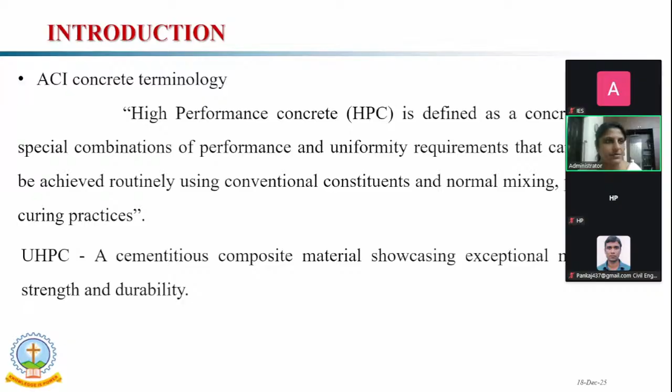All this performance can be achieved by incorporating high strength steel fibers. We are considering only the fine aggregate; we are neglecting the coarse aggregate, and using binders, chemical and mineral admixtures, and water.

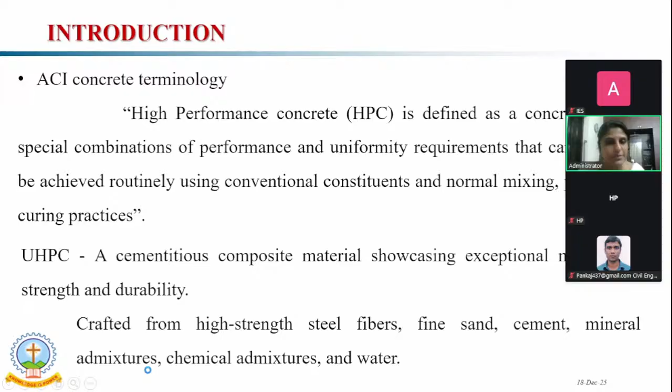UHPFRC means ultra high performance fiber reinforced concrete. It is a combination of three types of concrete: one is high performance concrete, one is self-compacted concrete, and the third one is fiber reinforced concrete. The mixture of these three is the ultra high performance fiber reinforced concrete.

The basic requirement of ultra high performance concrete is that, in order to get the high performance, we need high binder content. As you all know, because of the high binder content, that means high cement content, this will negatively impact the sustainable aspect.

So we have to reduce the cement content by considering some mineral admixtures or supplementary cementitious materials of high pozzolanic material content. The high performance of UHPC can be achieved by considering the low water to cement ratio. We have considered the water to binder ratio as 0.17, 0.18, and 0.19. But by considering the low water to binder ratio, we cannot achieve the required flowability.

The main criteria we consider for ultra high performance concrete are the compressive strength beyond 120 MPa and flowability of minimum 200 mm, since, as I said earlier, it's just like a self-compacting concrete. In order to get the flowability of 200 mm with the low water to binder ratio of 0.17 and 0.18, it is very difficult to achieve.

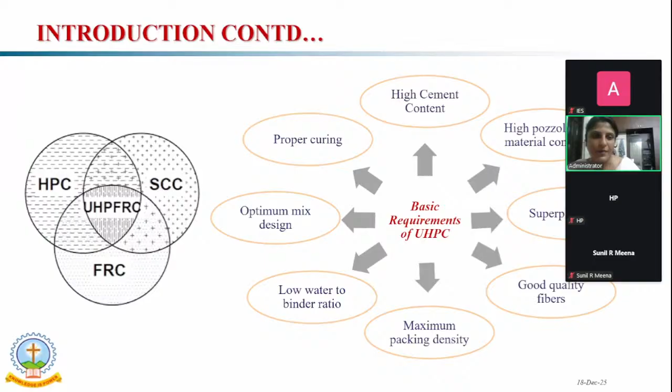If you compare the properties of normal concrete, high performance concrete, and UHPC: in the case of compressive strength, normal concrete, as you all know, is in between 20 to 50 MPa. For high performance concrete, it is in between 60 to 120 MPa, but in the case of UHPC, it is above 120 MPa.

Similarly, the flexural strength for normal concrete is 3 to 5 MPa, while for UHPC it is around 20 MPa. In the case of tensile strength, normal concrete is 2 to 5 MPa, but for UHPC it will be up to 15 MPa.

The modulus of elasticity is 25 to 34 GPa in the case of normal concrete, but in the case of UHPC, it will go up to 50 to 60 GPa.

If you consider the historical background of UHPC: as we are familiar with the development of Portland cement in 1824, from that 1824 to the development of HPC, that was in 1970, and UHPC was first introduced by de Larrard in 1994, until the UHPC of today.

To develop the UHPC, we have considered these 5 criteria: material characterization, optimum packing density, mixing technique, fresh UHPC state, and the curing methods.

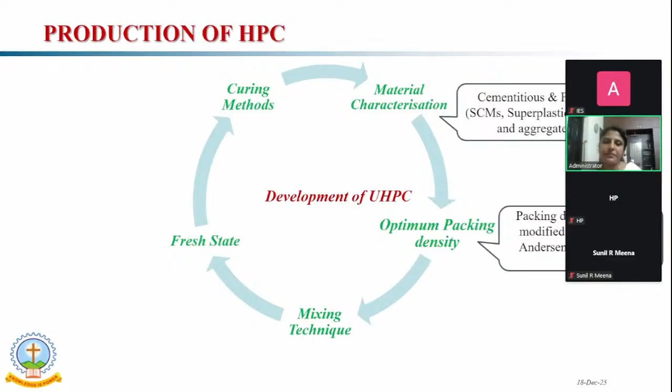To get the optimal particle packing density in the laboratory experiment, we have considered the Puntke test. And by using software, we have considered the EMMA software, which is based upon the modified Andreasen and Andersen model. The EMMA software is developed by Elkem. That will be discussed later.

The mixers we have in the laboratory: we have used the Hobart and planetary mixer, and we have done that experiment. Then we have developed UHPC with 150 MPa using the high shear mixer, that is an RMC.

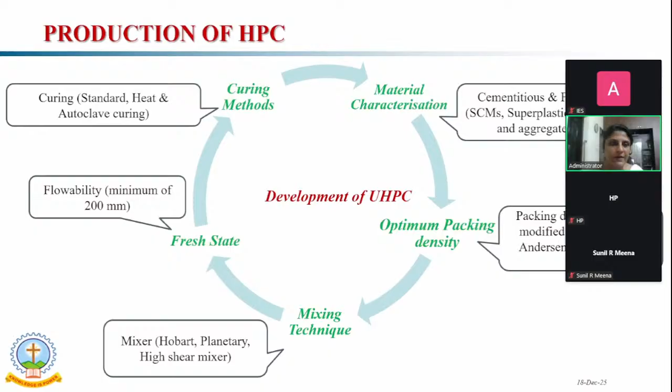Flowability we have considered, as I said earlier, minimum 200 mm. There are three types of curing methods: standard, heat, and autoclave curing. But in this case, we have considered only standard curing and the heat curing method.

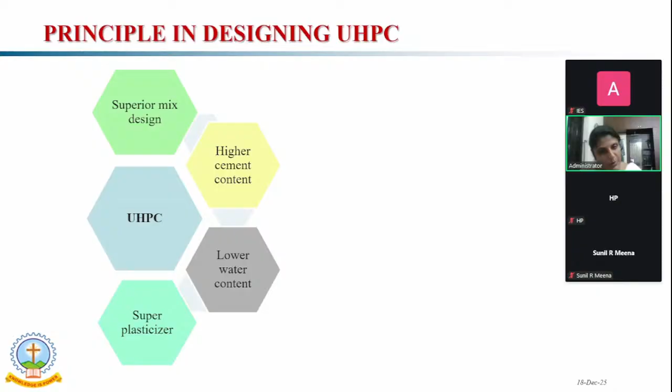UHPC needs a superior mix design: high binder or cement content, low water content, high-end superplasticizer, fiber addition, and a specific curing method. By considering heat curing, we can enhance the microstructure through that heat treatment.

In order to obtain high performance, we have to consider the maximum particle packing density. That has to be achieved by optimizing the granular mixtures. We have considered so many parametric studies by varying all the constituents to develop the UHPC.

We have arrived at an optimized granular mixture. Then we can enhance homogeneity by eliminating coarse aggregate. Also, we can reduce the weak section in the ITZ zone. Then we can enhance the ductility behavior by incorporating steel fibers, which bridge the cracks.

Considering the sustainability aspect of UHPC, we can reduce the cross section, resulting in a more slender structure. By reducing the cross section of the structures, we can improve the aesthetic appearance as well as reduce environmental impact issues. Then, to get high performance concrete, we have to consider high binder content, meaning high cement content.

To reduce carbon dioxide emissions and get a green, cleaner product, we have to optimize the UHPC by considering some supplementary cementitious materials. In our study, we have considered alcofine or ultrafine slag, GGBFS, and silica fume.

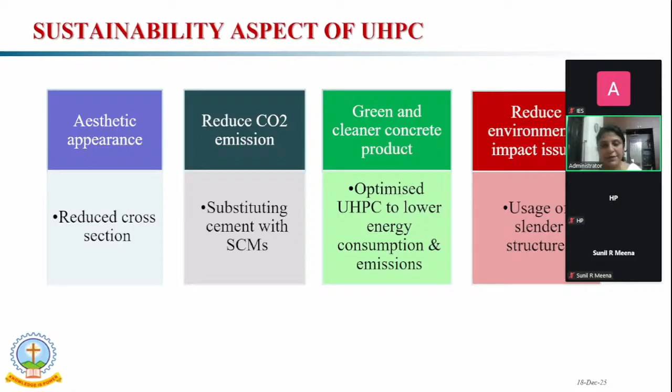As said earlier, we can reduce the cross section of the structure. If you consider conventional concrete, we need a certain depth; but mainly the UHPC application comes in the case of girders. The depth of the girder in conventional concrete can be reduced by using UHPC, since our strength is too high.

Comparing conventional concrete and UHPC, the particle packing in UHPC is too good, having minimum pores. By minimizing the pores, the particle packing density can be improved. By improving the particle packing density, we can enhance all the mechanical characterization as well as durability properties. Also, we can reduce the depth of the section, introducing a slender cross section.

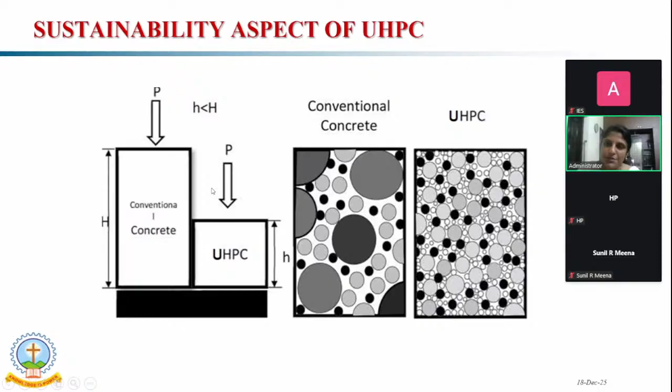So the main benefits of UHPC: we can reduce the cross section, reduce the maintenance, and improve the ductility behavior. Since reduced maintenance achieves longer life, and improved strength reduces cost. Actually, the initial cost of UHPC development is too high because of the material and curing method. But considering the project as a whole, accounting for maintenance and durability, we can save economically.

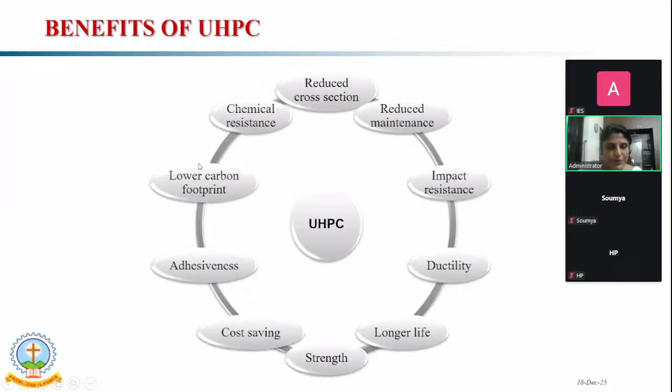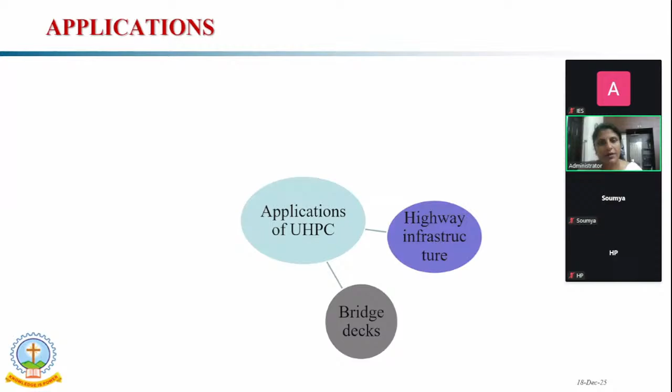By considering supplementary cementitious materials, we can reduce the carbon footprint, making it sustainable. The main applications of UHPC are in highway infrastructure, bridge decks, bridge girders, seismic columns, accelerated bridge constructions, wind turbines, and tunnels.

Particle packing density: the performance of a concrete mix can be optimized by the packing density. The packing density has a great impact on concrete performance by considering a lower water-to-binder ratio. Then we can reduce the permeability and also reduce the porosity.

The major factors affecting particle packing density are the size and grading of aggregates. In the EMMA software, the main inputs are the size of the aggregates and the effectiveness index. We provide 0.23 to 0.27 for the finest particles. The compaction process mainly affects particle packing density, but since this is self-compacting concrete, we are not providing any external vibration.

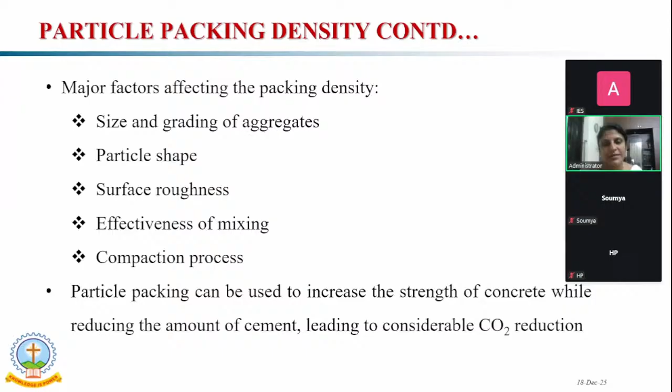We are providing only about 3 seconds of external vibration. By improving the particle packing density, we can reduce the amount of cement, which leads to a reduction in carbon dioxide emissions.

This is an example of the EMMA software graph. By inputting the aggregate size and the effectiveness index, we get the modified Andreassen model shown in red color, which represents the good particle packing curve.

Then we add our mixes into that software: M1, M2, M3, and M4 mix. When we incorporate these mixes, gaps appear showing that certain sizes of particles are missing. In some cases we can increase the size of particles, or increase the quantity of a particular particle size, or reduce the quantity of that size, in order to fit the curve into the modified Andreassen model.

So what we have done is, firstly, we considered the MAA model, then we considered many trial mixes and plotted them on the EMMA curve to check the graph. Then we modified the mix design by considering this graph.

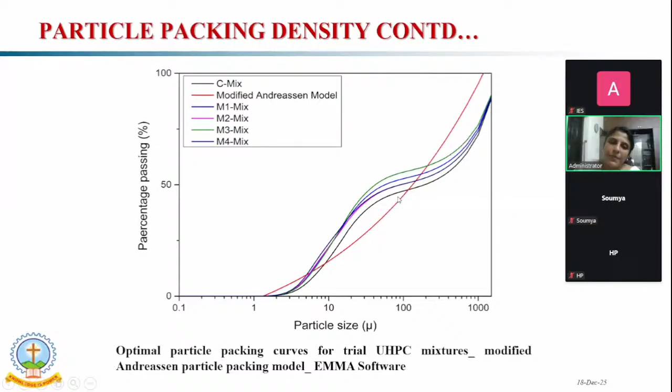If you consider the disaster management phases, there are mainly 5 phases: prevention, mitigation, preparedness, response, and recovery. UHPC plays a role mainly in prevention, mitigation, preparedness, and recovery.

Mitigation means reducing damage before a disaster occurs. The problem with conventional concrete is sudden collapse or brittle nature during disaster. UHPC helps because it has very high compressive strength, tensile strength, and strain hardening behavior. This allows structures to sustain extreme loads with controlled cracking instead of sudden failure.

Preparedness means designing the structure to perform under extreme conditions. By providing thin sections, we can reduce the dead weight. Due to high stiffness, we get less deformation, and it has excellent fatigue resistance also. UHPC structures are not only strong but also smartly prepared - they absorb energy instead of collapsing.

In the case of recovery, it is not just rebuilding what was lost, it is rebuilding faster, stronger, and smarter. In conventional concrete, after a disaster, repair often requires long curing time, thick sections, and repeated maintenance. But UHPC has high early strength - we need only thin repair sections and it provides excellent bond with the existing concrete.

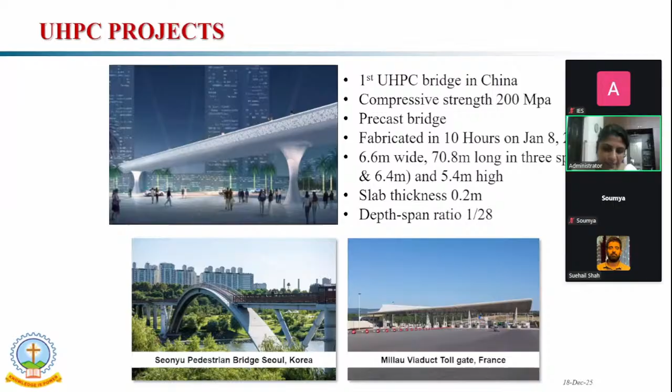India's first UHPC bridge is in Maharashtra. Using UHPC, they could reduce the self-weight by 30 to 35% compared to conventional concrete, with a strength of 155 MPa. In the case of the Mumbai GCC clubhouse, it is 8.4 meters long using UHPFRC, with only 3 to 12 mm diameter rebar considered. In that case also, the self-weight could be reduced by about 30%.

The main challenges in UHPC are actually the short history of worldwide field application, maybe because of the high material cost and high equipment cost - the high initial cost. But mainly what I felt is that it is because of the lack of guidelines, the lack of code of practice for the structural use of UHPC, and the lack of experience in the local engineering society.

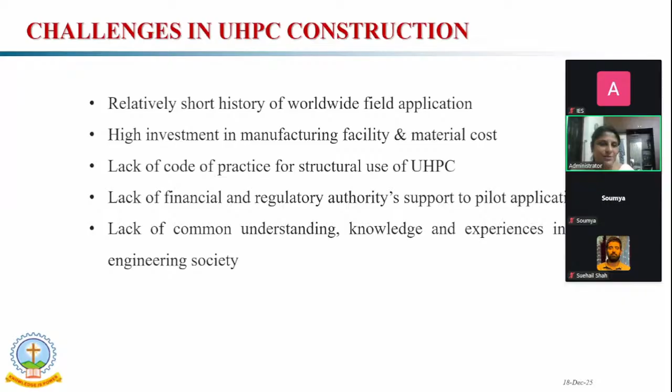This is our main focus area in the research: can we develop UHPC with locally available materials? When we went through the literature, we saw UHPC production majorly in Canada, China, USA, and others. But can we develop UHPC with locally available materials in the Indian market? That's our main focus area.

The project team - this is a funded project by Kerala Highway Research Institute in collaboration with IIT Madras, IIT Tirupati, NIT Calicut, and MACE.

One minute. Hello. Hello. This is our project team.

We developed M125 concrete, M150 concrete and M175 concrete, using locally available materials. We have also developed some mixing guidelines, since conventional mixing practices cannot be appropriate in the case of UHPC. So we developed mixing guidelines to develop these mixes.

To develop these mixes from M100 to M175, we considered many parametric studies by varying various constituents to develop the UHPC. With the developed mixes, we considered mechanical characterization, fracture parameters, stress strain characteristics, and modulus of elasticity. We also studied the durability characteristics.

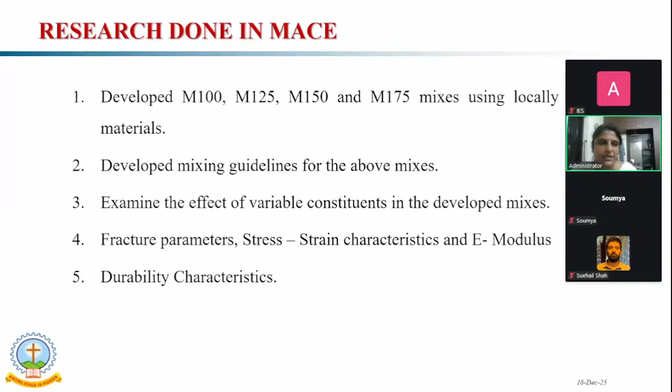The main materials we have considered: ordinary Portland cement of 53 grade. Supplementary cementitious materials are alcofine or ultra fine slag, GGBS, and microsilica. We have considered both densified and undensified microsilica, but I think the undensified microsilica works well. Superplasticizers, PCE based, we have considered.

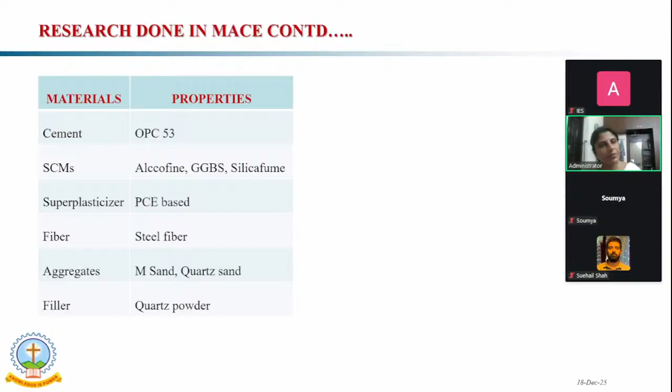We have considered steel fibers with aspect ratio 100. Then we have considered M sand, quartz sand, river sand, standard sand, all. In the case of filler, we have checked with quartz powder and limestone powder, but finally we have

agreed with the quartz powder. Then for the type of curing followed, in the case of parametric study, we have considered curing temperatures like 90 degrees centigrade as well as 60 degrees centigrade. We also varied the delay period - after casting, after 24 hours of casting, we demolded the specimen. Delay period means the time before it is put into steam curing. We considered 24 hours, 48 hours, and 72 hours delay period. From all this, we got that the 48 hours delay period shows better performance.

Then there is also the curing period. In the accelerated curing tank, we kept all the specimens for 24 hours, 48 hours, and 72 hours. From all the research, we agreed that the 48 hours curing period got the best results.

How we apply heat curing: in the accelerated curing tank, there are 2 layers. In the first layer, up to the first layer, we kept the water, and then put that water at 90 degrees centigrade for 48 hours. Then in the second layer we have put the specimens for 48 hours.

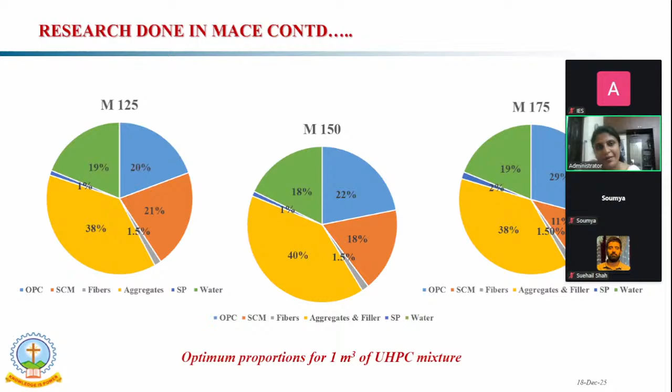After all the parametric studies, our findings are: we have considered many ordinary Portland cements, meaning different brands of ordinary Portland cement. We found that we can use any brand of ordinary Portland cement - they all work very well.

In the case of sand, we have considered standard sand, quartz sand, river sand, and manufactured sand. The best results we got are from standard sand, quartz sand, and river sand. We could reach only up to 150 MPa with M sand. But due to the availability of standard sand and river sand, finally we moved on with quartz sand.

Then in the case of fiber content, we considered a parametric study varying the dosages of fibers and the aspect ratio of fibers. Finally, what we found is that as we increase the dosage of fibers, performance characteristics increase, but that negatively affects the flowability. I will show some figures with that. The proper dispersion of fiber enhances the

properties of UHPC. As we increase the aspect ratio, that also increases the performance of UHPC, both flexural and compressive strength. But that is only beneficial up to an aspect ratio of 100. So we considered 20 mm straight steel fibers with 0.2 mm diameter, and compared that with 13 mm long fibers with 0.2 mm diameter. From all the studies, we concluded that 2% of 13 mm fibers shows the same results as 1.5% of 20 mm straight steel fibers.

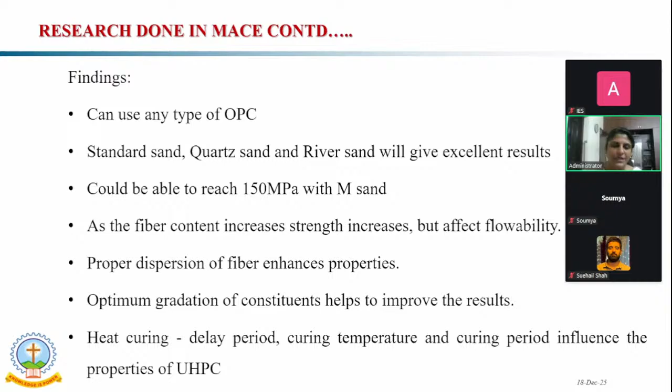Optimum gradation of constituents helps improve the results. We considered the Puntke test as well as EMMA software. In the case of heat curing, we considered different delay periods, different curing temperatures, and different curing periods - all of these affect the properties of UHPC. What we followed is 90 degrees centigrade with a 48 hour delay period and a 48 hour curing period.

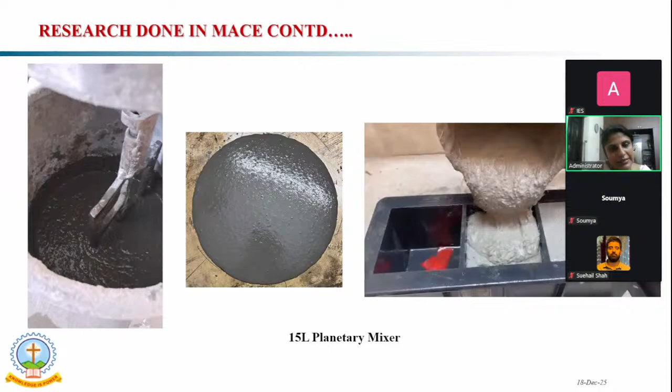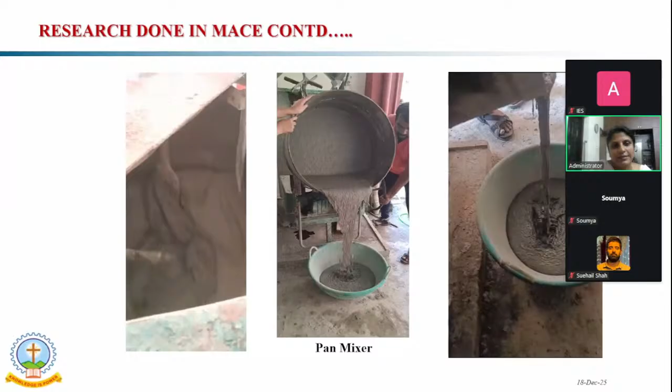Then from this, it will follow. The flow is like this. We have considered the high shear mixer that is in the RMC plant, and in the laboratory case also, we got almost the same consistency. This is the RMC plant. Actually, the flow is...

To do the experiments, we have servo-controlled machines. Servo-controlled machines we can collect the details after the post-peak behavior. That is the main advantage of this servo-controlled machine, because if you are considering the FRC, fiber reinforced concrete, after the post-peak, they can control the crack. So the main behavior that will be up after the post-peak point.

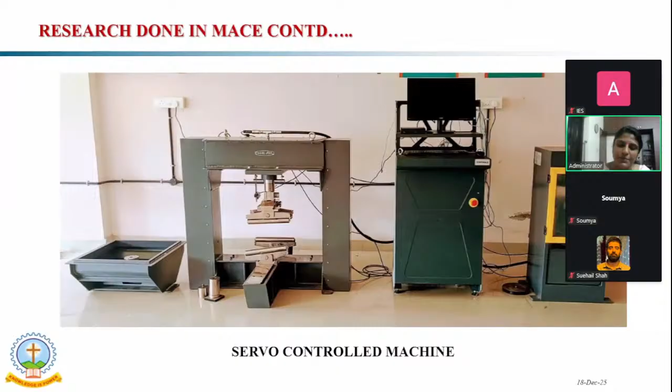Then this is what I said earlier. If you are increasing the dosage of fiber, that will enhance the properties of the UHPC, but that will negatively impact the workability part. Negatively impact means there will be fiber agglomeration. There will be no proper dispersion of the fibers. Without the proper dispersion of the fibers, we cannot get the good results.

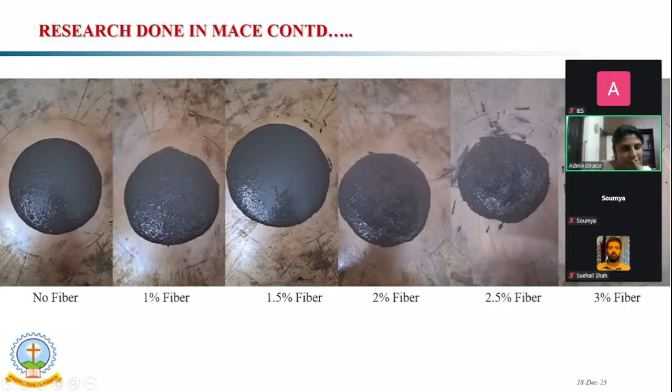So from this only we have, this is the 20 mm straight steel fiber. From this only we have adopted, by considering both the criteria. Both the criteria is both the compressive strength and the flowability part. In the case of flowability, the 1.5% shows better results, better dispersion of fibers.

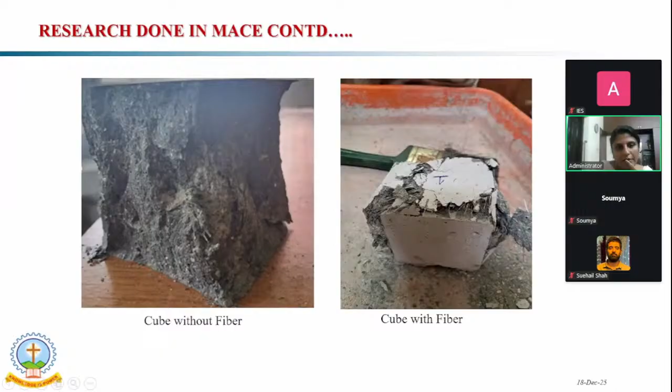In the case of normal concrete, the flexural strength is 3 to 5 MPa, but in the case of UHPC, we got 16.9 to 28.6, from the M120 concrete to M175 concrete.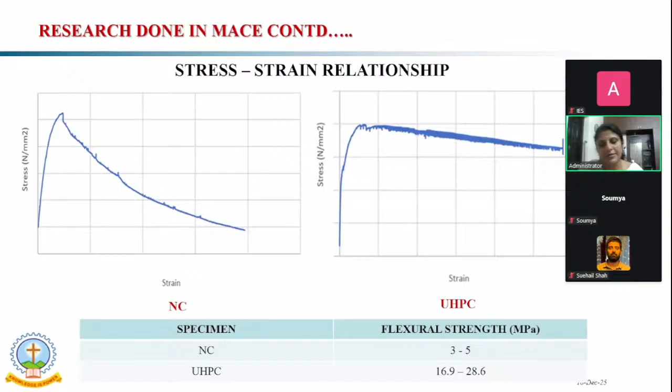We are considering the fracture parameters also. There will be a very high increase in the case of fracture toughness by using UHPC.

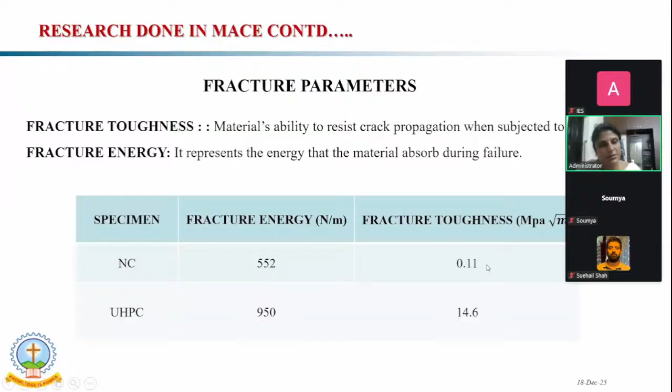In the case of elastic modulus, to find out the elastic modulus of the developed UHPC mix, we have considered the servo control machine itself, and we have considered 3 stages, cyclic and uncyclic loading and unloading.

In the first 3 cycles we have considered, for the M150 concrete, the expected stress is 150 Newton per mm square. The first 3 cycles that is 1/6 of the expected strength, and the last 3 cycles that is 1/3 of the expected strength. By using this, we got the values. The E modulus of M125 is 47.945 gigapascal. M150 is 49 gigapascal. M175 is 55 gigapascal.

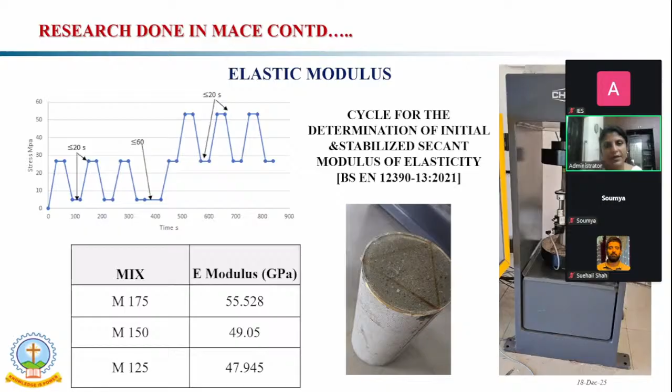We have followed the EN 12390 code. We have also checked a slab, a UHPC panel, with the size of 60 centimeters. Then that has been checked by using the servo controlled machine.

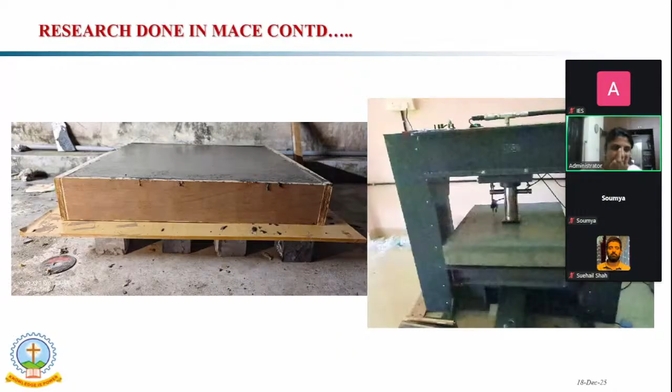As part of durability studies, we have conducted water absorption, sorptivity, acid attack, and sulfate attack tests till now. In the case of water absorption, we have considered 90 by 100 mm. Then sorptivity, 100 mm diameter and 50 mm chord from the 150 mm cube. In the case of RCPT, a 50 mm thick slice of 100 mm nominal diameter cylinder. Then in the case of acid attack and sulfate attack, the 150 mm cube.

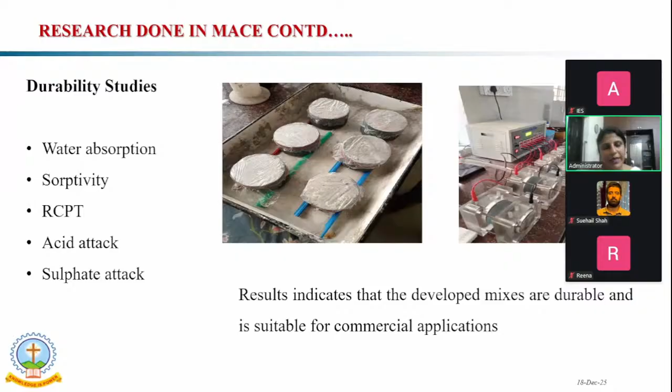These are the results comparing normal concrete and UHPC. In the case of durability studies, the water absorption is too low when we compare with normal concrete. It is only 0.7. Sorptivity index is 0.65. RCPT in coulombs is only 108 coulombs, but in the case of normal concrete, it is 2200.

In acid attack and sulfate attack tests, weight loss is only 3.6 in the case of UHPC, and 0.828 for sulfate attack weight loss in the case of UHPC, when compared to normal concrete where it is 1.93.

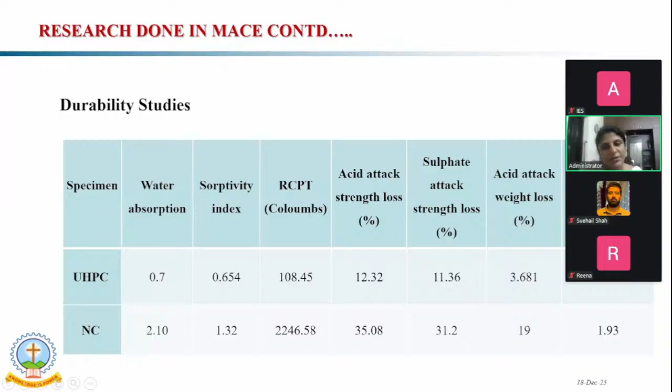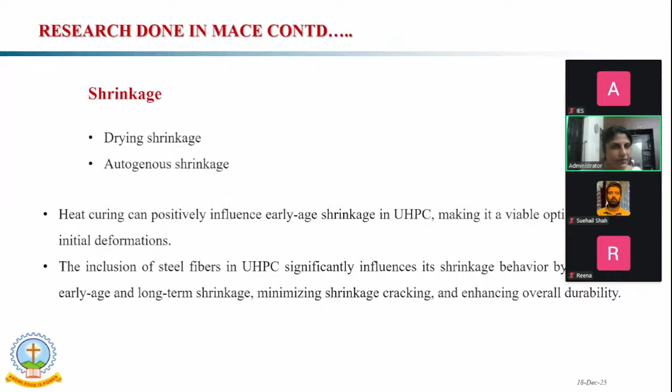For shrinkage, we considered only the drying shrinkage and the autogeneous shrinkage, using a specimen of 280 by 20 by 20 mm. We considered heat curing and normal curing, and also studied the effect of inclusion of fibers versus without fibers on UHPC.

As part of that funded project, we finally concluded it with the casting of a girder with a 6-meter span. We considered 4 girders to compare properties: in normal concrete we considered both a rectangular cross section and an I-section, and the next two girders were one with UHPC alone and one with UHPC combined with steel bars.

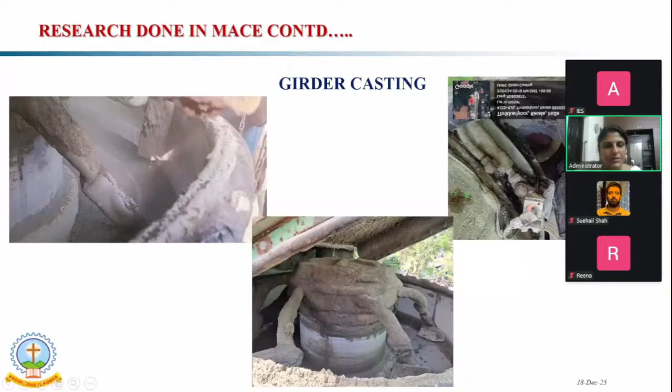This was, I think, the first largest production of UHPC in Kerala, carried out at the Kothamangalam RMC plant. These are some pictures of that girder casting.

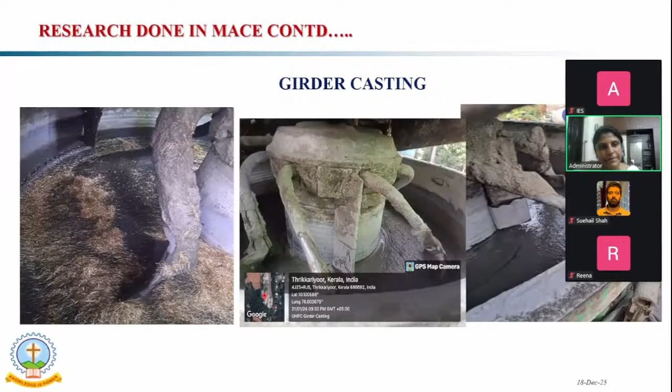This is our team, along with the girders of 6-meter span. One is with UHPC and one is with UHPC with rebars. For the normal concrete girders, we developed and cast that concrete in the campus itself.

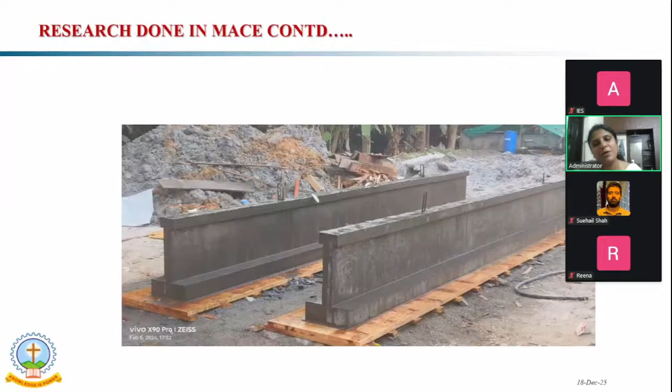The main challenge we faced in girder casting was the high density mix. As you see in that flow, the fresh UHPC mix had a density that was too high, and the first time it was unpredictable for us. When that flow came, the formwork actually got washed out - that was a very big failure the first time.

The second time, we reworked the formwork design and considered so many bracings in it. That's the only way we could support the fresh high-density UHPC mix, because that happened only with the redesigned formwork.

Next was determining the optimum mixing procedure. Up to that point we had only considered the laboratory procedure, where initially we put the aggregate and the binders and mix it for 2 to 3 minutes to get proper dispersion of the silica fume.

After that, to control the initial heat of hydration due to the very low water-to-binder ratio, we considered using ice cubes. We initially used 80% ice cubes - after getting a good mix of the binders and fine aggregate, we added the 80% ice cubes and continued mixing for 5 to 6 minutes.

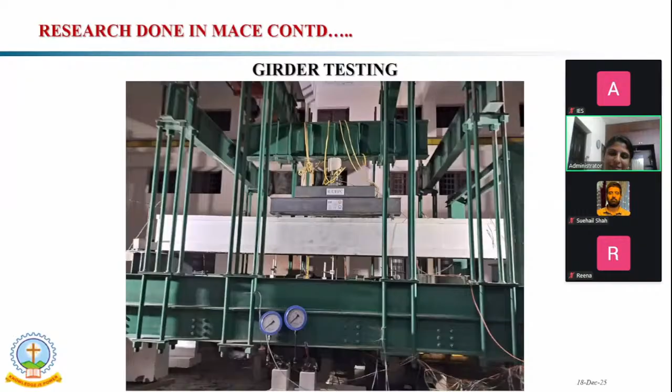After 28 days, we tested the girders, all 4 girders. We got around 700 kilonewton in the case of UHPC alone. But when we considered UHPC with rebars, we didn't get accurate results because when we loaded that UHPC with the steel bar girder, the loading pressure pump blew. So there was only a small crack in the case of UHPC with steel bars girder. It didn't fail in that testing. I tested all 4 girders.

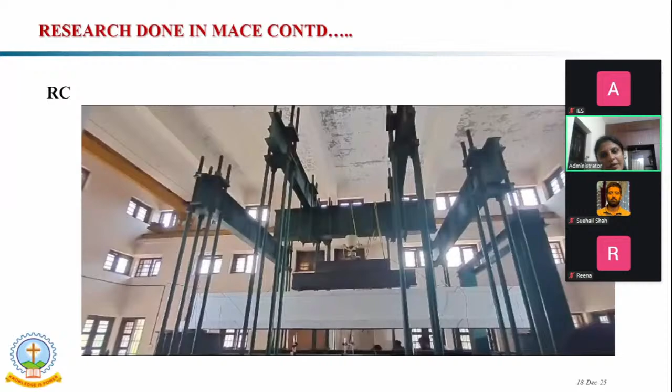This is the reinforced concrete girder. In the case of UHPC, there will be small deflection initially, but after releasing the load, it regains its original shape. That happened at that time - only a little crack occurred in that girder. It went beyond the capacity of the loading frame, so we tried again, and the same thing happened.

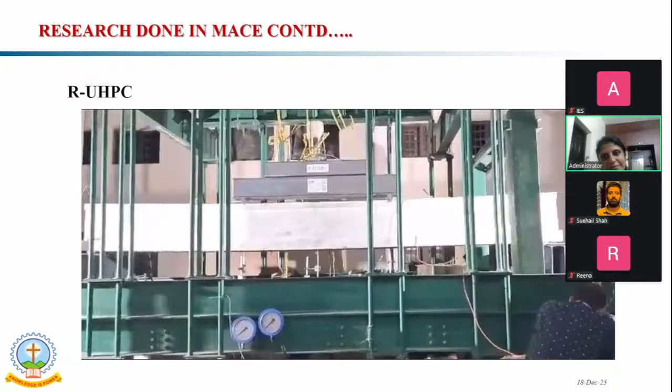We also considered normal concrete with the rectangular cross section as well as the I section. This is our reinforced UHPC - only a small crack occurred here. That only happened in that UHPC reinforced girder.

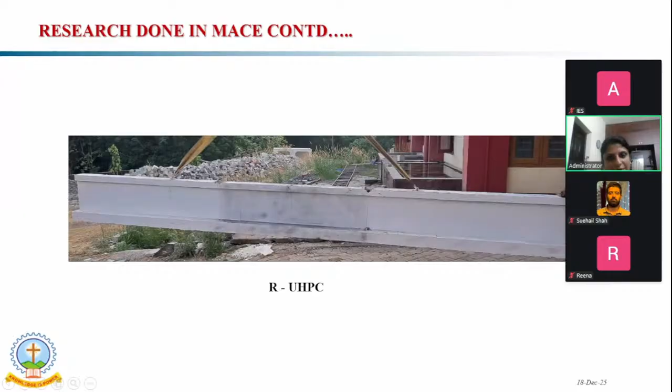Ma'am, there is a question in the chat box: How can UHPC enhance the disaster resilience of critical infrastructure such as bridges, hospitals, and emergency shelters?

That's what I said earlier. By considering UHPC, we can prevent more damage occurring due to disaster by considering its high compressive strength and high durability properties, and thereby we can reduce the impact. That is what distinguishes ultra high performance concrete from conventional concrete in terms of composition and behavior.

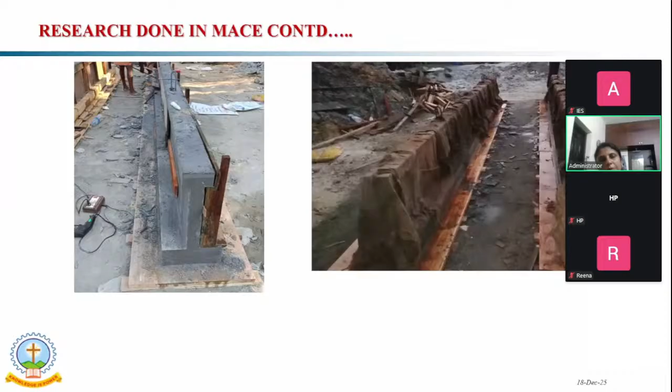As I said earlier, I showed one table there for composition. When we consider the constituents to prepare UHPC, considering different parametric studies, we need to increase the cement content up to around 900 kilogram per meter cube for 1 meter cube of concrete. But for below M120 concrete, we need only cement content up to 450 to 500 kilogram per meter cube. Then we can reach HPC up to 140 MPa.

We can reach that by considering Alcofine, GGBFS and such materials. But to get above 140, to reach 150 MPa, we require microsilica - silica fume is one of the major factors to reach that strength requirement. To reach M150 concrete, the compulsory requirement is microsilica, steel fibers, avoiding coarse aggregate, and increasing our binder content to 1100 to 1200 kilogram per meter cube. We need to increase our binder content - we varied it from 900 and...

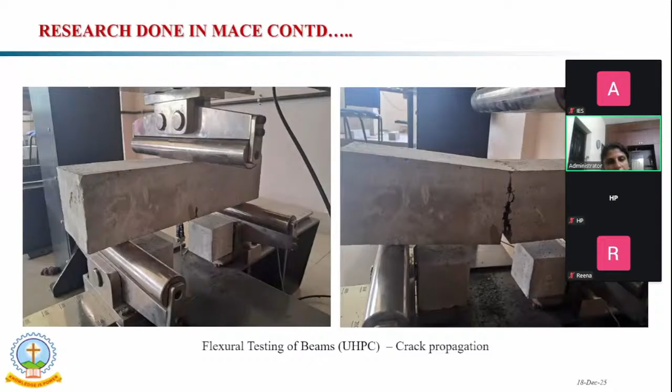To achieve high performance concrete without fiber, we got results up to 110 MPa. When we compare the strength parameters, I showed one table comparing normal concrete, high performance concrete, and ultra performance concrete. The major parameters when we compare normal concrete and UHPC show the strength parameters are much higher, including the modulus of elasticity.

Okay. Any other questions?

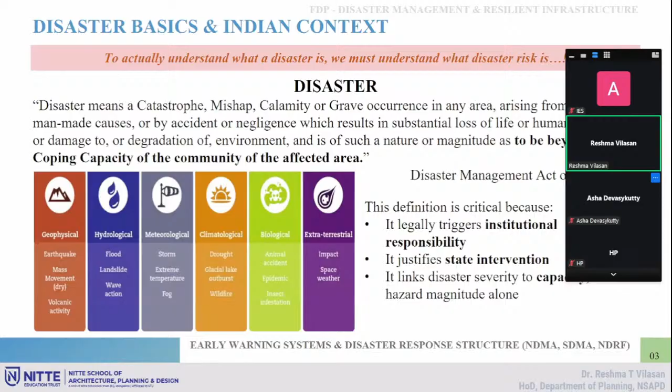This is the standard definition of a disaster by the Disaster Management Act 2005. Now let us build on that thought. A disaster happens when a hazard meets people, infrastructure, or systems that are not prepared to cope with it. Going back to this, the disaster increases when the coping capacity is less.

So we often explain this using a simple relationship: disaster depends on hazard, disaster directly depends on vulnerability, disaster directly depends on the exposure.

Now, have you noticed how the same amount of rainfall today causes more flood than it did 20 or 30 years ago? This is not because rainfall has suddenly become dangerous. It's the same amount of rainfall, but because of our increase in exposure and vulnerability, this rainfall is becoming a disaster nowadays. This understanding shifts our focus from nature to governance, planning, and preparedness.

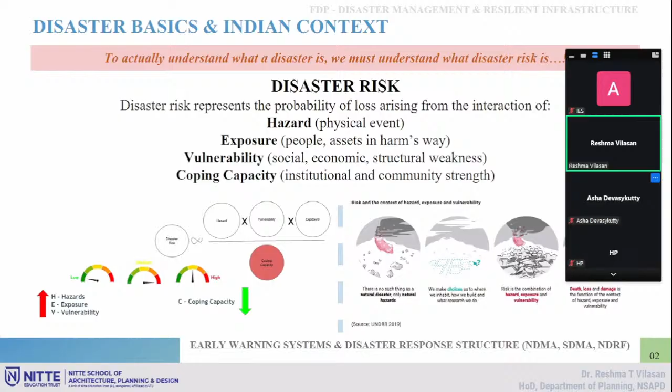In the previous session, the resource person explained these terms, but I'll give small glimpses here. Preparedness means to prepare for managing the crisis. The crisis may be flood, landslide, earthquake, or cyclone, any of the disasters. Prevention is to minimize the impact of a future disaster, or mitigation is reducing the impact.

If it goes to the post-disaster stage, once the disaster happens, we have two stages. One is response, the immediate stage, work to save lives and minimize immediate impact. And the other stage is recovery, the later stage, to restore activities and services.

Now, the interesting thing is everyone is focusing heavily on response and recovery. Why? Because they are visible. But my point is, at what stage do we actually have the maximum opportunity to save life? The answer is the pre-disaster stage, where prevention and preparedness happens.

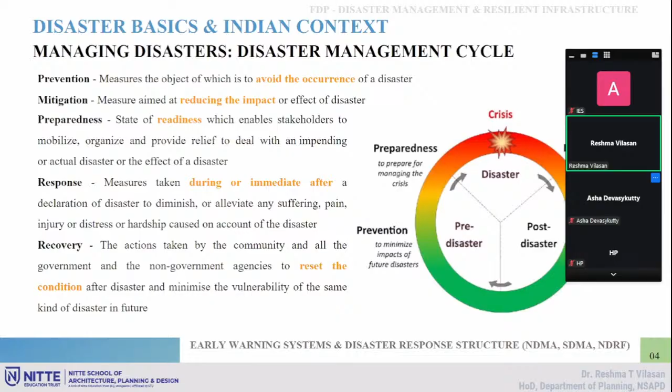And this is exactly where the early warning system fits in. It directly influences the response system. An effective early warning system ensures a smooth transition from preparedness to response on a timely basis to reduce the scale of loss. There comes the importance of early warning system.

India usually follows a three-tier institutional system supported by a specialized response force. I'll go through each stage, starting with the top level. It is NDMA, the National Disaster Management Authority, commonly called NDMA, chaired by the Prime Minister.

Now, NDMA is not a firefighting agency. It does not rush to disaster sites with rescue equipment. Instead, NDMA does three important things: it frames all the policies and guidelines, it prepares the National Disaster Management Plan, and it coordinates with scientific agencies and states. So think of NDMA as a body that sets the rules of the game. It decides how disaster management should be done across the country, at the state level and the district level.

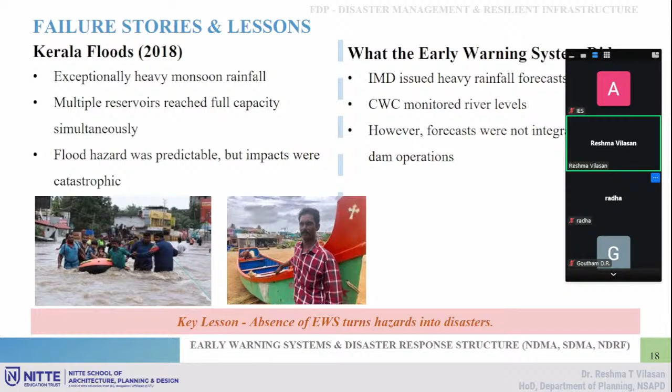IMD issued heavy rainfall forecasts, and CWC monitored river levels. However, the forecast was not integrated with dam opening decisions - this is where institutional failure occurred. The result was 400 deaths, massive displacement, and economic loss across sectors.

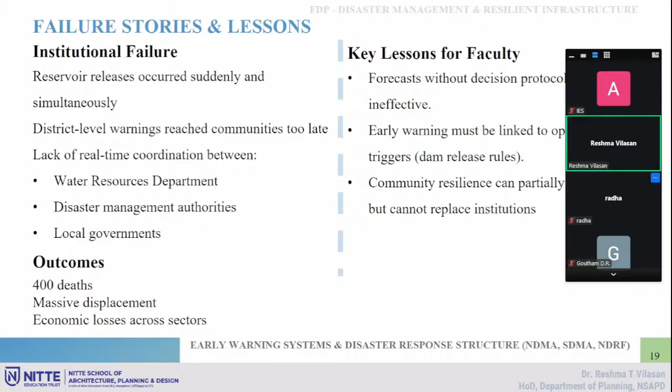And the next disaster is the Uttarakhand disaster, which is an example of what happened where there is no early warning at all. Here, there was no monitoring, no alert, no time to react. Sudden glacier collapse in the fragile Himalayan ecosystem. This case reminds us that in a fragile environment, absence of early warning can be a disaster.

No monitoring, no alert, and high-risk infrastructure development resulted in catastrophic losses with no reaction time. So there was an institutional gap: no real-time glacier monitoring, no downstream siren or alert mechanism, and infrastructure planning ignored extreme risk scenarios. So altogether it became a disaster.

Here comes the role of architects, civil engineers, and urban planners. I want to integrate best practices and failure stories. What works well is a successful early warning system: multiple agencies but a single message. Even with multiple agencies, it should be a single message. Forecast plus decision protocol linkage should be there. Redundant communication channels, regular mock drills, and community trust are needed.

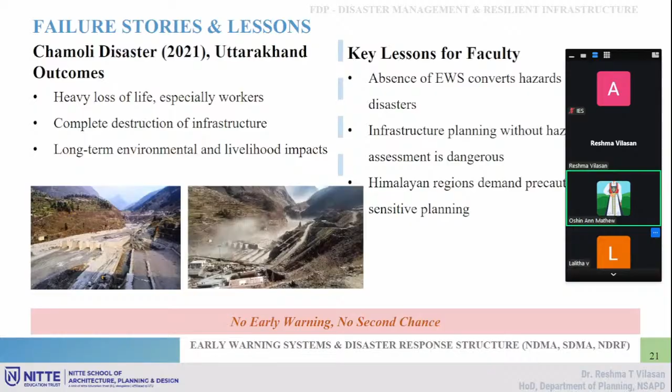Something happened. So, is it moving? Are the slides moving or stuck? Hello? Yes, ma'am. Ma'am, it's moving, it's moving. Hello? Yes, ma'am. Slide is moving. Yes, moving, ma'am. Proceed. Please proceed. Am I audible? Yes, yes, ma'am, you are audible.

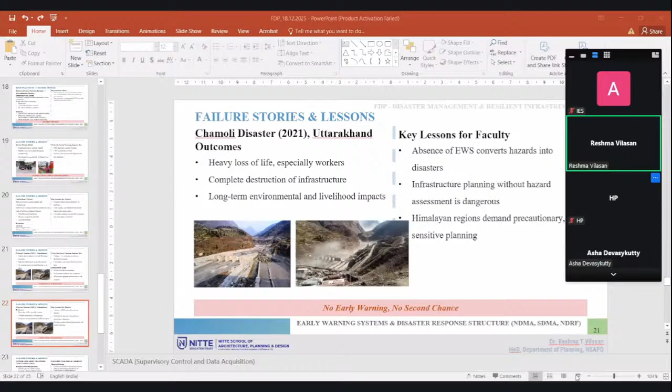Ma'am, can you make it a slideshow? Hello, ma'am. Hello. Hello? Ma'am, can you change it into slideshow? Okay, okay, it's gone back again. Okay, okay, one second. So, am I audible? Yes ma'am. Yes. It is not getting into slideshow. One second, wait for some time. Yes.

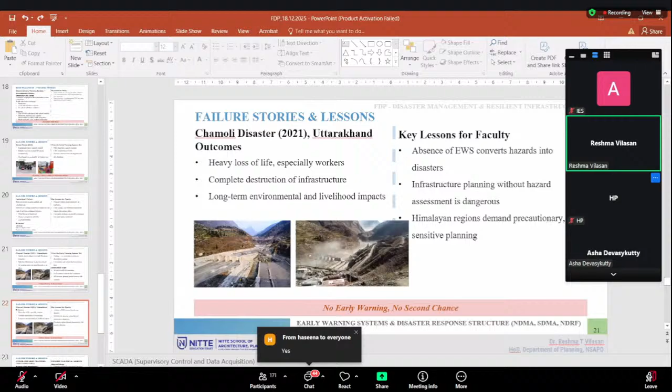So it was easy for us to take the key takeaways from this. Let us pause and reflect on a few things. Hazards are natural, but disasters are not. Disasters are mainly because of man-made, anthropogenic activities. Because of what we are doing, disasters are mostly happening.

Early warning systems save lives only when institutions act on the warning. We got this from the failure stories, and governance, coordination, and preparedness matter more than technology alone.

So the final compilation of the entire work is how this matters to faculty, practicing architects, planners, or civil engineers. As faculty members, as I am also teaching and we hope most participants are teaching, we shape how future professionals think. By integrating disaster risk reduction and early warning system concepts into our teaching and research, we influence long-term resilience. In that, we have to go with governance understanding, infrastructure design, and planning decisions.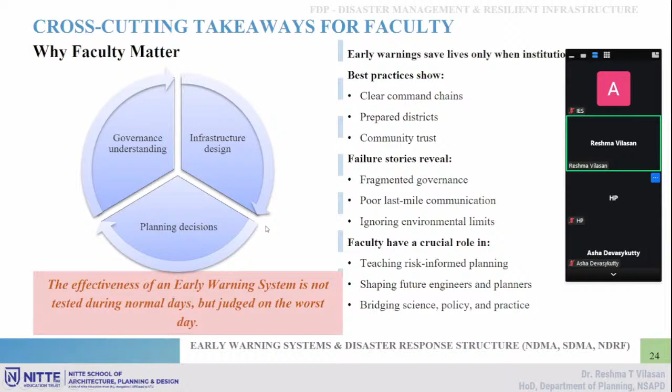Ma'am, can you hear me, ma'am? Yes, some glitches are coming. Whether you will... hello? Hello. Yes, ma'am, here it is getting delayed. Your voice is breaking. Maybe my... one second, I'll check with my internet. Okay, yes. Ma'am, for an effective early warning system, what will be the key components? Can you please discuss that, ma'am? Yes, again my...

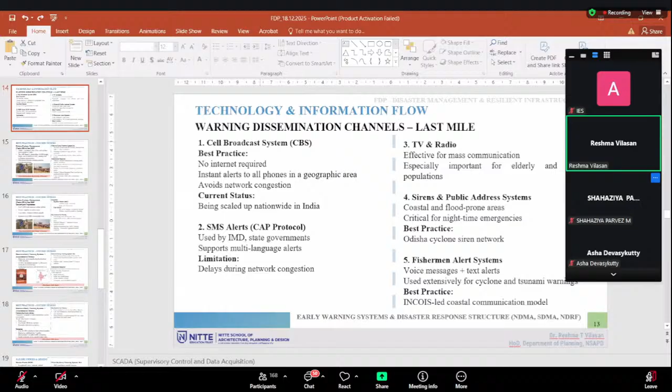So in this slide, I have already mentioned the core components of an effective early warning system. Before going into detail about the components, we should understand what an early warning system is.

It is a combination of detection, analysis, and alert, and after that alert we should have a response. Each stage we should explain in detail. What is detection of that disaster, how to detect whether the disaster is going to happen.

So to detect threats as early as possible is a positive sign. If I can detect an earthquake 5 hours back, then I can easily go with the analysis and the response. So I can give the alert to the people, and for flood also the same way.

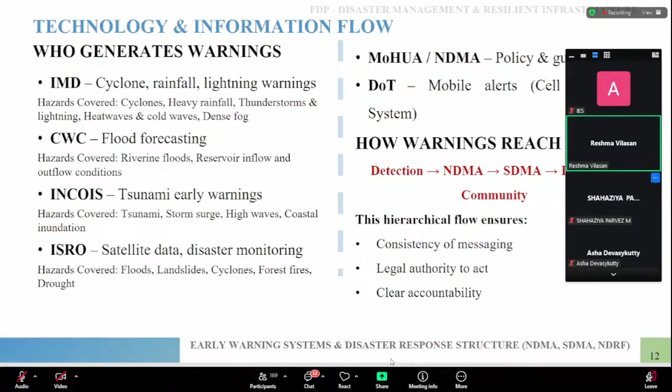For that, we are taking help from the organizations shown here, like IMD, CWC, INCOIS, and ISRO. They will be providing us alerts like rainfall data, consistent rainfall data, and water level rise. CWC does flood forecasting, and INCOIS gives tsunami alerts.

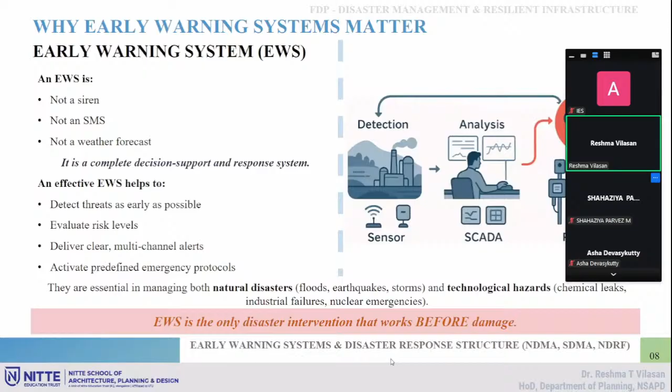So next, once the detection is done, we have monitoring and detection, which includes seismic, chemical, meteorological infrastructure sensors. The next thing is data analysis.

In data analysis, systems analyze incoming data against a configurable threshold. Threshold means the maximum value or the minimum value. If the sea level rises more than 2.5, we should give the early warning.

We should give the alert to the people. If rainfall reaches orange alert level, the people should be prepared enough to evacuate from their places. So these things come in the second stage, the analysis stage.

Then from the analysis stage, alerts are delivered to the people through quick modes, where we can go with sirens sometimes, or radio frequency signals, or SMS or mobile applications. Then that alert has to reach the people, and through that alert and the emergency plan...

We should take the evacuation routes. We should identify shelter in place, which means we should identify the camp prior. So we will take that affected population to the camp, and give the emergency response.

So these are the major stages of an early warning system. Once this is done, each stage should have coordination with the institution. Each stage means first the detection, we should have coordination with IMD and CWC.

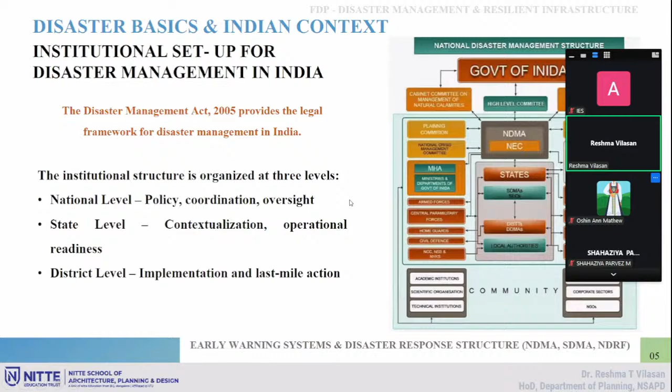So how does an early warning system differ for natural disasters like flood, earthquake, and landslides? So the early warning system itself won't be changing. The warnings will be changing. So here I'll show that.

So here, the disaster cyclone - in the best practice, I have quoted cyclone as a best practice, not as a cyclone management example, but as early warning management best practice in the Odisha cyclone. So here, early warning doesn't change from disaster to disaster. Early warning is a process where we will be identifying the issue at a prior stage, then analyzing the issue - even if it is cyclone, flood, or landslide, there is not much change for each disaster.

Then comes the identification of that issue, then the warning is generated. So it doesn't depend on each disaster type; it depends first on the amount of disaster that happened, and second on the timing of the disaster. So the early warning system should happen immediately after the disaster occurs or before the disaster occurs. It doesn't matter whether the disaster is flood, landslide, earthquake, or cyclone. The early warning system should be provided just before the disaster starts, through the data you get from the organizations.

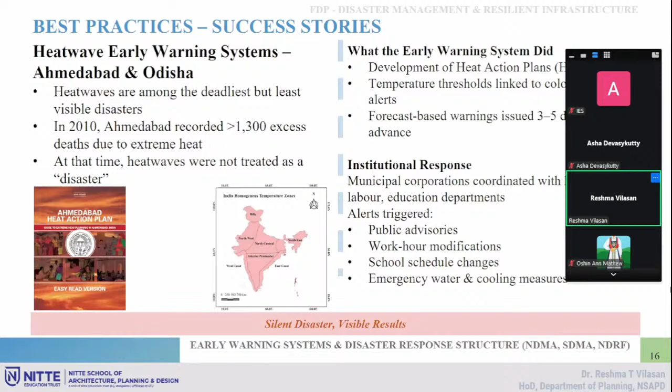We can implement this. For this early warning system, the data should be obtained from the organizations which I have already mentioned, so I'll go through that.

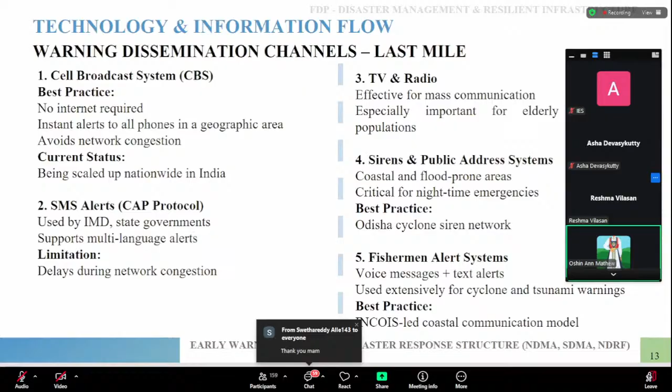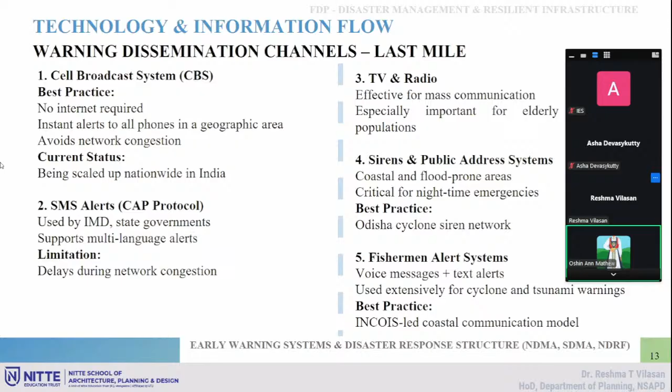So with that data, we can proceed. Yes, data we will be getting—that's what I explained in the stages. So as an institution, what we can do as faculty is implement a curriculum in the teaching field, or go with a research cell. We can't set up the actual early warning system ourselves, or else we should go with that.

These are the major three stages: detection, analysis, and alerts. Detection also involves the analysis part. If you are getting data for flooding, for example from IMD, the detection and analysis is done by SDMA. So as an institution, you can take up that analysis or detection stage to determine that an area will get flooded in 3 hours or 5 hours. That analysis you can do from your lab or facility.

Then you can share the data with SDMA. The government only should give the alert. As an institution or organization, private or educational, we don't have the authority to give the alert to the people. So the analysis part or detection part, you can do it in your lab.

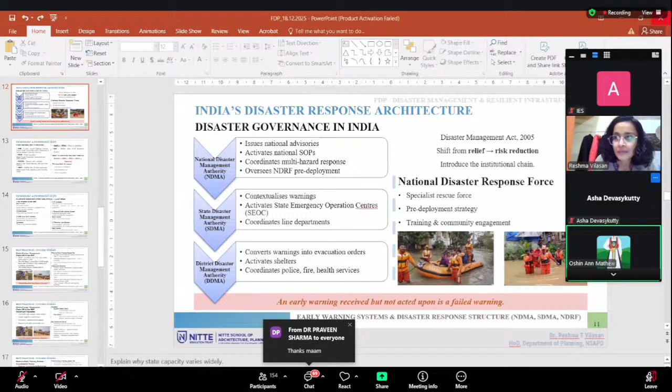And I am so thankful to you and the entire team for giving me the opportunity to express my interest - this is my interest area. So if we can collaborate later on, I would be so happy to collaborate on disaster related studies with the civil engineering department. Okay ma'am, thank you. Okay ma'am, thank you so much.